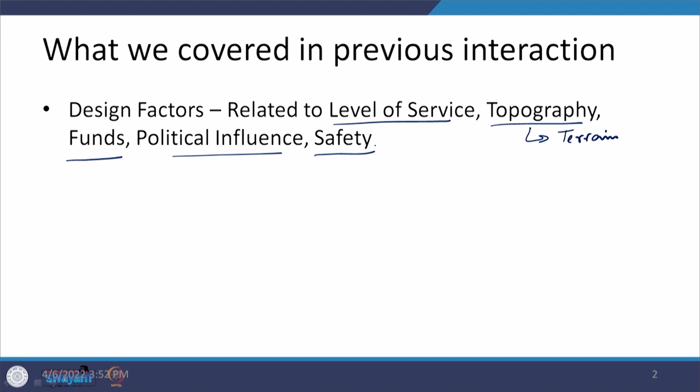And finally, we concluded with the safety measures, and in those safety measures we talked about how safety can be implemented in terms of the provision of devices, operations, or by having features within the design itself.

Now let us move ahead. Today's interaction is going to be on topics like ecological aspects and environmental aspects, and once we have completed these, we will be done with the factors that influence the geometric design features, which we will discuss in the subsequent interactions that follow.

Then we will try to see what amount of space is required for different types of facilities, such as urban roads, rural highways, expressways, or hill roads. Before going into those amounts or widths to be provided in terms of road space, we will also look at the controlling factors that define how much space is required and why.

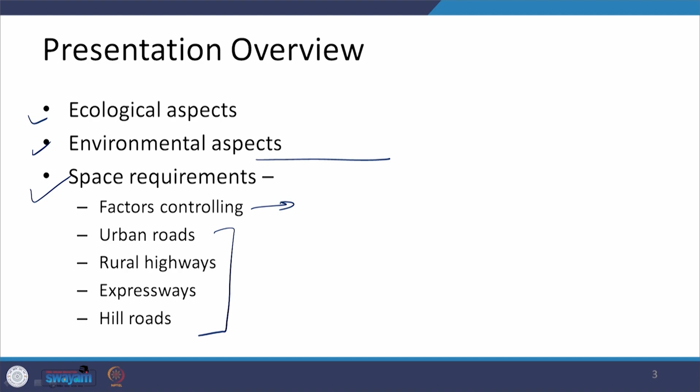Let us start with the first thing, ecological aspects. These ecological aspects make a big decision in areas like hilly areas or rural highways which are passing through maybe a sanctuary or an ecologically sensitive area.

If that is the case, we have to see that it is not going to disturb any ecological aspect in that area in terms of flora and fauna, and if it is getting disturbed, what alternate measures can be taken up. So the key point here is that ecologically sensitive areas need to be identified, and we have to see what remedial measures can be taken so that sensitivity is not jeopardized.

Now, when we work in any area where the road is passing, if it is passing only through a plain terrain, probably there is not going to be a big difference whether it is plain terrain or hilly area. But if it is passing through a sanctuary, then this particular aspect comes into play.

So when this happens, there may be a possibility that you, as an engineer, have to go for a permission, and this permission will come from a relevant ministry. Say if it is an ecologically sensitive area, then that relevant ministry can be the environment ministry, and the proposal will go there.

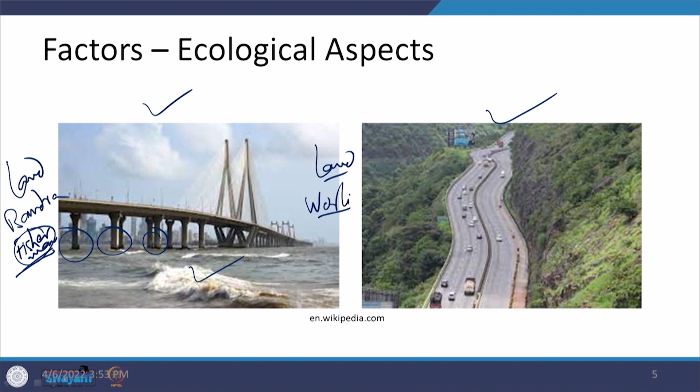So this is an important aspect which we need to look at. The other thing we have to see is that there can be geological disturbances. Geological disturbances can be in different forms, and one form is in terms of faults.

Another case can be soil erosion or flow. It all depends on whether the material is loose in nature, and it will also depend on the moisture content.

Amount of moisture coming into the soil can cause the soil to move towards the valley side, leading to failure of a road. Land degradation is another ecological issue, faced when vehicles that have completed their life are taken out of service and placed as scrap on land. Different vehicles get placed like this, consuming land, and this is also considered a degradation of land.

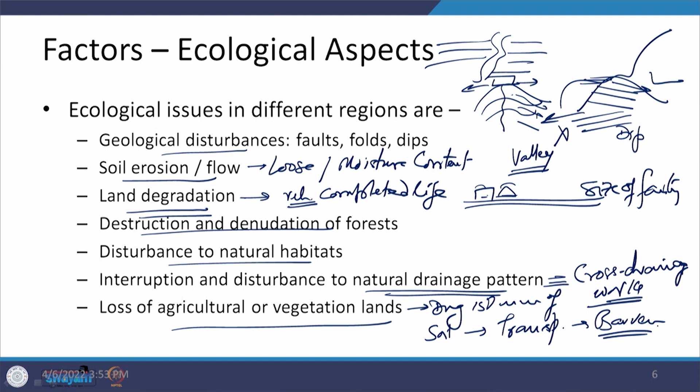Loss of agricultural or vegetation land - if the size of the facility is big, we dig roughly around 150 mm of fertile soil, and this is transported to a barren land, where you place this particular soil. So the fertility of the other area is improved, and whatever the total fertile area was available to you remains as such.

Here you can see some examples. The first example is related to the movement of soil, and because of that movement towards down, we found that this road has just failed in this area.

The other case is the landslide. The loose material has come from the top and it has blocked the road. You can see there is a queue of vehicles on the other side.

The third one we are talking about is related to drainage. The water is coming from the upper region in the hilly area, and proper provisions have not been made - there is no drain here. If this drain is not there, whatever water is coming will seep into the pavement crust, and this is going to fail.

The fourth one is a very good example where the highway passes through a sanctuary area and a passage has been provided for the animals here. This is an overbridge provided not for traffic, but for animals, constructed so they do not feel a difference between the side land and the land through which they are passing - that is how the conflict between the animal and the vehicle has been removed.

The fifth is the case of a fault, and because of that fault it has moved and the road has broken here. These are the things which may happen, and if you have not taken care of all these aspects, this will create a problem.

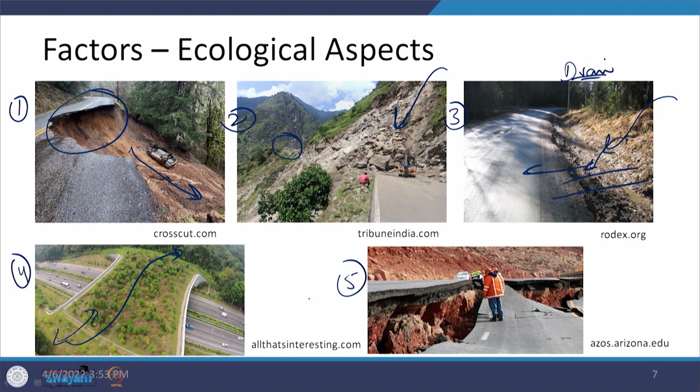So I have talked about landslides as well as soil stability. Big analysis needs to be done in this area, so geotechnical investigation will be required.

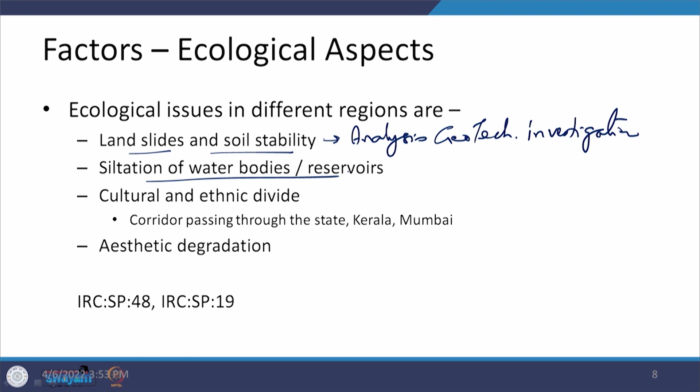So, this is one thing. Siltation of water bodies and reservoirs also happens if you are constructing a road and, without understanding, you are taking out the material in terms of cut and putting it towards the valley side, and it goes into the water body. Then it flows towards the location where the dam is being constructed and silts it there; that creates a problem.

Another issue which has been observed is a cultural and ethnic divide. You can understand this by taking two examples which I have written here, one for Kerala and another for Mumbai. Kerala is this type of a state when you are going to the boundary of the country. What was proposed was to create a north-south corridor, and when it was proposed there was a hue and cry; people said you are going to divide us as east and west, and therefore we do not want this type of a corridor which divides us.

In fact, Mumbai is also a linear city, and there the highways have been constructed as a western highway and an eastern highway, and within the western highway you have the side which is towards the sea and the other side away from the sea. So those areas also have a distinction and there is a divide in that also. So we should also look at these aspects when planning, designing or implementing any facility in any specific area.

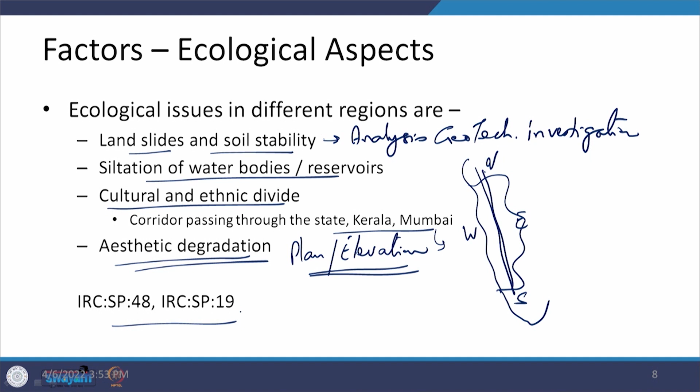Aesthetic degradation is another important thing. Whatever is being planned, how good it looks in plan or in elevation is also important. It should give you a pleasing feeling when you look at that facility either from the top or from the sides. If you are interested in more of the aspects related to these, you can go through SP 48 and SP 19, which are the Indian Roads Congress codes, and you will get some information there.

Now, let us come to the environmental aspects. Whatever facilities you are going to provide are going to be used by different road users, and the vehicles are the main component of that, and that is where two important aspects are air pollution and noise pollution. How we can control and abate this air pollution and noise pollution by providing certain roadside facilities or roadside furniture is what we need to look at.

Land degradation, I have already talked about; this can also be a part of the environmental aspect, where we can think of vehicles being dumped as scrap, and that is one big problem in the western countries, because a lot of vehicles are being dumped, and then you need machinery to change them into a sheet and pile them up one above the other. So this is one example of land degradation here.

You may require certain specific aspects to be provided where you have specific requirements like snow. In areas with a lot of snowfall that you have to clear, there may be a requirement of increasing the width of a facility to take care of that. In high rainfall areas, you need to look at the proper cross-sectional elements in terms of camber as well as the drains, and the drains are going to take some space. Desert areas means the movement of the sand, how to control that and how to protect your facility.

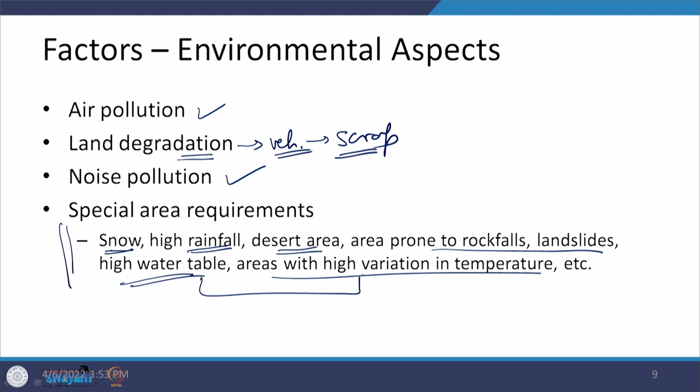What you can see here is a problem with respect to the snow: snow has been removed from the road and has come to this side. So there is black ice, and if this black ice is there, then when you apply the brake it is going to create a big problem. So that is one issue we have to take care of.

Here another case is shown with respect to the movement of the sand in the desert area. The third one is related to noise pollution in, say, a shopping area, because of the many vehicles coming to it, if proper measures are not taken. And the fourth shows the effect of pollution on a road in an urban area where you cannot see anything beyond this particular point.

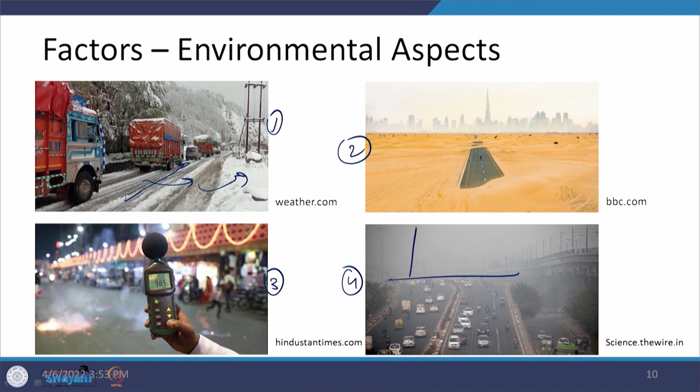So, these are the visibility aspects which are going to be affected. Now, once we have an idea about all of these things, let us look at the space requirements. In the case of space requirements, first of all we are talking about the factors which are going to make a difference here. The very first thing is a road category.

Are you going to design an expressway? Are you going to design a local road in an urban area? What exactly are you trying to design? Or we can talk in terms of a functional value. Are you interested to provide a high speed facility, or are you going to provide a facility in terms of accessibility to a remote area where the traffic is not so high? So, these are going to define how much space is required to construct a particular road.

Type of users. So, we have talked about the vehicle composition. Composition is going to define who the users are and whether there is a requirement of providing an exclusive facility for the users who are having a higher proportion. That means you are adding more to a carriageway which otherwise could have been used by all of the vehicles in terms of mixed uses.

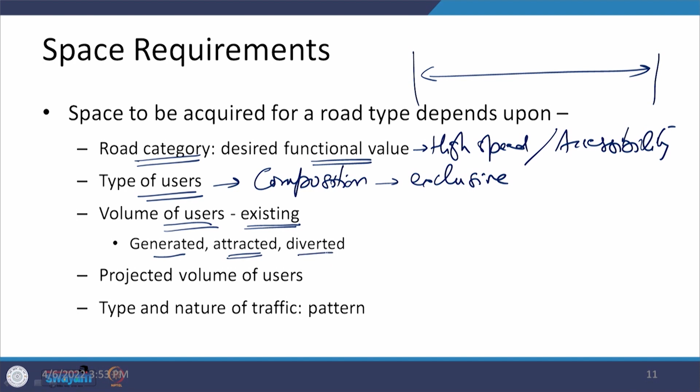Then volume of users needs to be looked at in terms of existing, which again we have already talked about; it can be generated traffic in an area, it can be because of an attraction value to an area. We also need to look at the traffic which has got diverted because initially the network was congested and people were using some other route, but now if we are improving upon the thing, then these diverted vehicles

will come back, and this is one of the reasons why in many cases where the facility has been expanded, it has been found that it is not going to work maybe after 2 to 3 months. The reason is, as soon as this facility has become good, those who were diverted have come back to this facility, and that is a problem.

Projected volume of users: all things like in terms of vehicles, in terms of population, in terms of land uses, we have to look at, and land uses are going to create an attraction value. Population and vehicles together are the things which are moving; we have to provide a facility for those sizes.

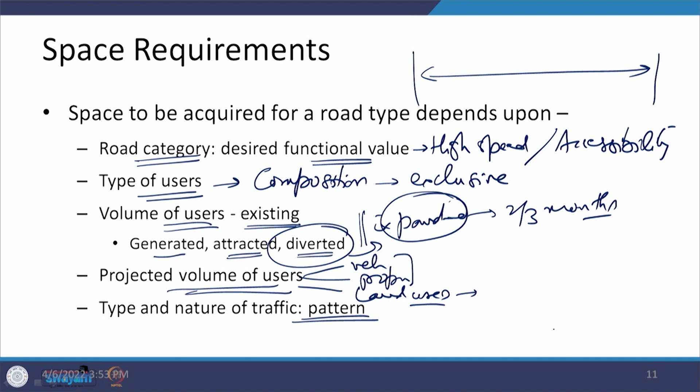Type and nature of traffic in terms of the patterns which are there: at what time what type of vehicles are going to be more, can we provide the facilities in those forms, or do we have to provide a facility on a general basis and therefore everything remains intact as such, nothing changes.

Roadside land use patterns: if there is a lot of development, then there is going to be local traffic versus through traffic in that area, subject to a highway passing through it, and therefore a segregation will be required, and if you have to do that segregation, then we may require a frontage or a service road. So, it means again we require something like 5, 7 or 10 meters extra on either side of a main highway. So, this is increasing the size of a facility.

Any other roadside amenities which are there, and in some cases you need to provide the spaces for proper entry and exit as well as for parking. So, this is again going to impact the size of a facility. Future development in an area we have already talked about.

Travel demand patterns, and when you are looking at the operational conditions, we talked about LOS in the previous interaction, where we said that a desired LOS of B or C needs to be provided, and for that, what is going to be the size of the facility is what we are looking at here.

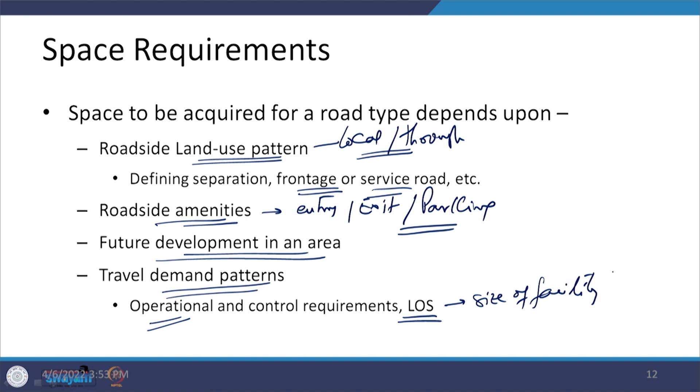Then another thing is the drainage requirements. So, drains need to be provided on either side. This is a very important thing. If it is not there, then in many cases it has been observed that the facility which was quite good when constructed deteriorated very fast; it has not lasted its design life.

Additional land for the expansion of a facility: this is on the basis of the predicted values which we talked about previously. So, we will have the predicted values, and these predicted values will tell us whether tomorrow we need 1 lane extra in a particular direction or 2 lanes extra in a particular direction. And if that land is not being acquired, then tomorrow it is going to be a problem. So, acquisition of land, the land requirement, is to be looked at today.

So, whatever is to be acquired, acquire it today only. Clearances to be made with respect to adjoining structures or property, because you cannot have a development and then the road is passing like this. You need to have some gap between these two things. So, this is what we are looking here. So, this is another aspect which is going again to make a difference, and sometimes you will be talking about this as a setback, and we will see that when we look at the requirements for the spaces in different conditions.

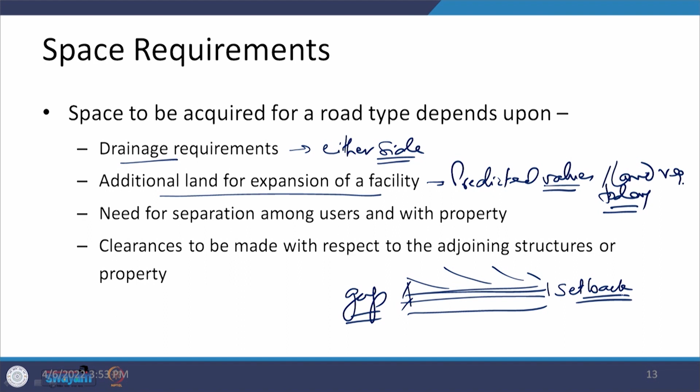So, let us look at first of all this diagram where the road is in an open area. What is the total space which is required is from this point to this point. What it includes? It includes the drains here on either side, it includes the extra land which is there, which may be required for the expansion of a facility tomorrow on the basis of the projected values. It talks about the various cross sectional features, here specifically being talked are shoulders and carriageways, and the side slopes which are going to be there if they have been constructed in embankment. If it is in cutting also, then also this may come up.

So, what you have is that you have a facility which is there within this domain, which is defined as a roadway width, and then thickness of the pavement has been shown here, and if you are looking at this, then this is actually the formation width. So, this is the formation level on the top of which the pavement has been constructed. So, this is wrongly shown here, we can modify it like this, and then anything rest of this is a road margin. So, the road margins plus the roadway width is what is giving you the total road land which is required in an open area.

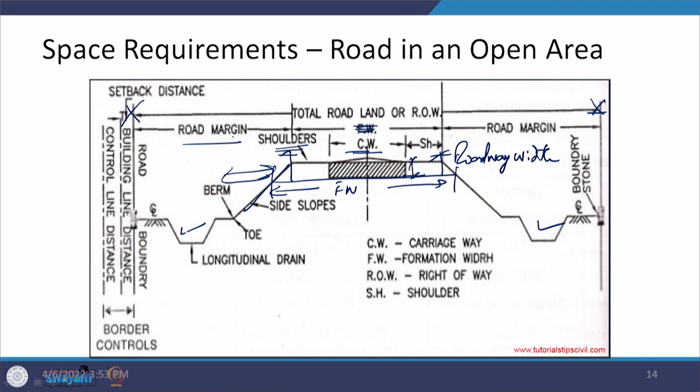So, this is like for a highway, but when you are in an urban area, then how the things may change is on the basis of the type of development around and the users who are going to be there. So, if we look here, we may have the pedestrians, there may be a possibility of providing the space for the movement of cycles also, and then all of the time we need to have the space for the vehicles to move, and there may be a requirement of a space for the parking of vehicles on the roadside, because there is a lot of development on this side or on the other side.

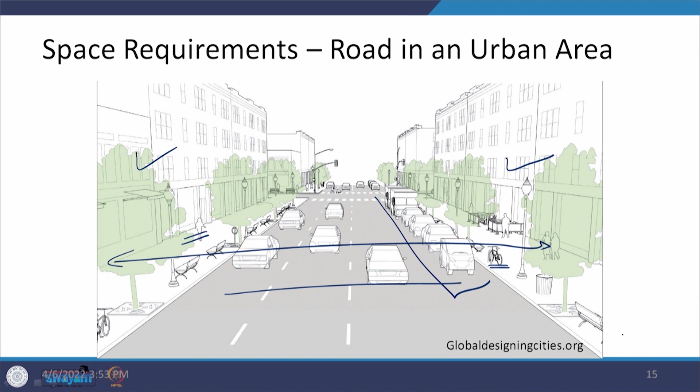So, again the point is that first of all we have to understand who the users are for whom the facilities need to be provided, then what is the type of facility which is there, and then how much space that facility is going to take, and that total will give you an idea that what is the space which is required from building to building. That means, we are also looking at the spaces between the buildings.

Now, let us come up to the space requirements for urban areas, and this can be looked at from IRC 86 also. We have the classification of the roads which we have discussed previously under the functional classification. The land width is being defined for the three terrain conditions, the plain, rolling and hilly, which is nothing but a combination of mountainous and steep terrain. Here you can see that as high as 75 meters is being recommended in the case of urban expressways in the plain area, but it reduces to 50 meters at the maximum in the hilly area.

And when you go from the top to bottom, then these values are reducing. At the same time, when you are going from plain to hilly terrain, then again the values are reducing. The reason is simple, that in the hilly terrain you cannot have a lot of land which can be acquired because of the terrain conditions, topographical conditions, and therefore, the values are going to be lesser. But when you talk about the local streets, then in that case it is more or less constant across all the terrains, and this is 10 to 15 meters. So, this is the space which has to be there at the minimum level.

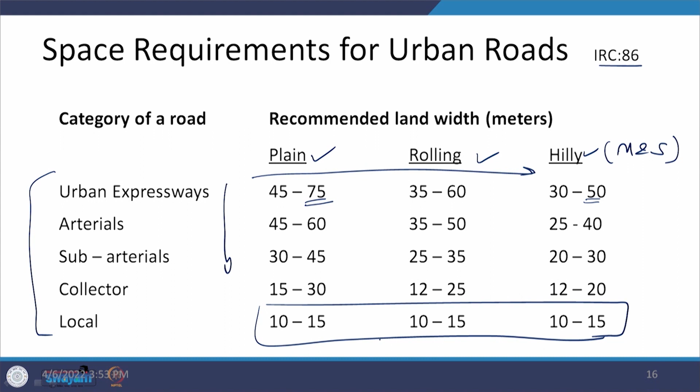But when you come to the rural highways, which can be looked through IRC 73, here apart from the classification of the roads and as well as the terrain, which has been defined now as plain and rolling and mountainous and steep, we also have a classification as an open area and a built up area. And then within an open area and built up area, we have N and R, which is the normal value or a range being defined.

So, this is what you are going to have an idea here when you are talking about the plain and rolling terrain. But as soon as you go to the mountainous and steep terrain, then only the normal values have been defined. So, in the case of plain and rolling terrain on the rural highways, if you try to see the minimum values, then they are falling in a range of 10 to 12 meters, depending on whether you are in a built up area or an open area respectively. But when you are in a mountainous and steep, then again it is constant at 9 meters.

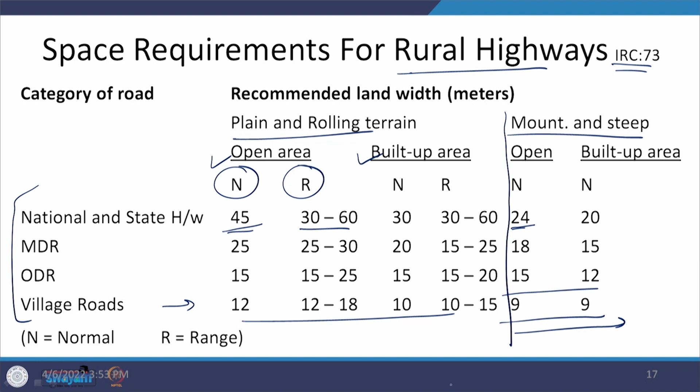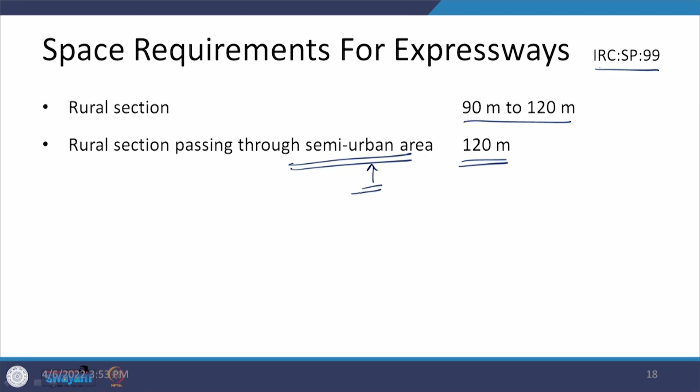Another case can be expressways, which can be looked at in IRC SP 99, where for the rural section it says that you should have between 90 and 120 meters, but as soon as it is passing through a semi urban area, then it says we should have 120 meters, because there is some space which is going to be dedicated to the traffic which is moving because of the development in the area. So, we are increasing it to that level.

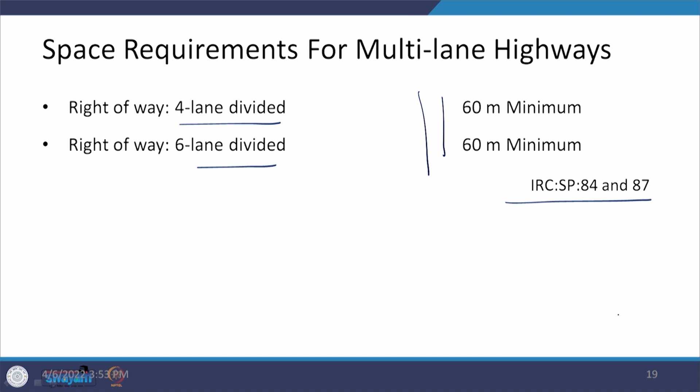Now, we are looking at the multi-lane highways, where two types of roads can be there, 4-lane divided roads and 6-lane divided roads. In both of the cases, the value has been defined as 60 meters minimum, and if you want to have some more information, then you can look at SP 84 and 87. Another case can be for hill roads.

Here you can go through IRC 52; again the categorization remains the same. Now, we are looking at only open area and built up area in this particular code. We can use the values which we have seen in the previous one with respect to IRC 73. The values more or less remain the same. There also we talked about 24, 18 and the minimum level 9, and here also we are talking about the same. So, normal values remain the same; the exceptional value is one thing which is being added here.

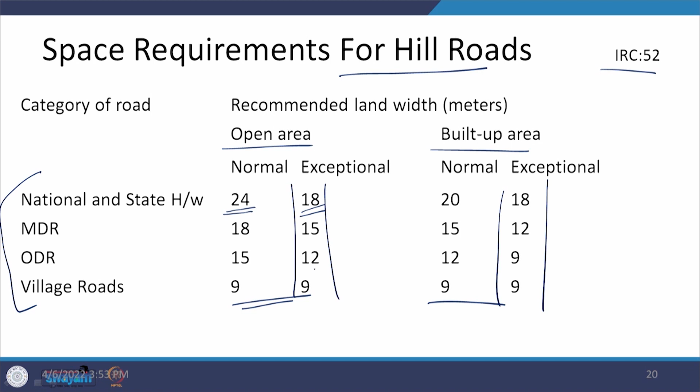And this exceptional value is changing to something like a minimum of 18 meters, which has to be provided under the exceptional conditions. It cannot be less than it, and if it is going less than that, then there is going to be a problem with the functionality of the highway.

A few things related to the hill roads here: the right of way should be enough to ensure a minimum setback of 5 meters for the building line from the center line of the road. So, if you have a road being constructed like this, then this is the center line and you have the building line, meaning the buildings can start from this. This should not be less than 5 meters; at least it should be there.

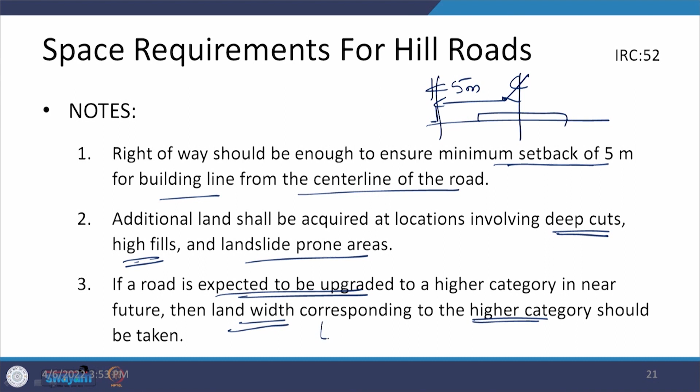Additional land shall be acquired at locations where there are deep cuts, high fills, or landslide prone areas. If those are the cases, then we need to get more land, maybe 0.5 meters, 0.4 meters, 0.8 meters. We are going to talk about that also at one point. If the road is expected to be upgraded, then today itself we should try to plan for a higher category, and the land which is to be acquired should be acquired for this higher category rather than the one which is there at the moment.

So, with this we come to an end of today's interaction, and we will be continuing with the space requirements in the next lecture, and if time permits, then we will be moving to the sight distance requirements also in the next interaction.